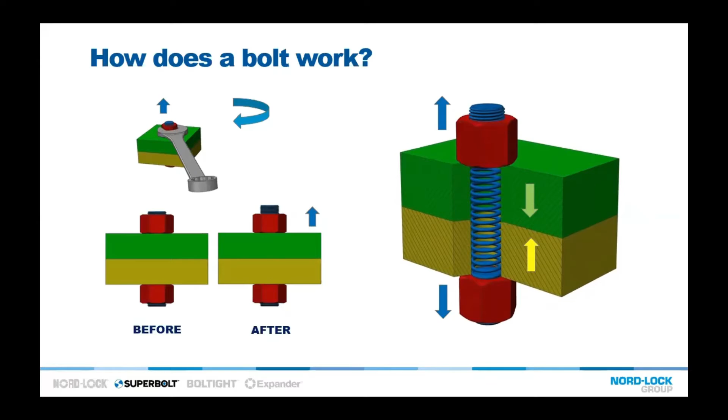So, simple principles of the bolt. I'll just quickly go through the torque formula. There are many torque formulas around today, and there's not one that is most accurate — they are all quite similar.

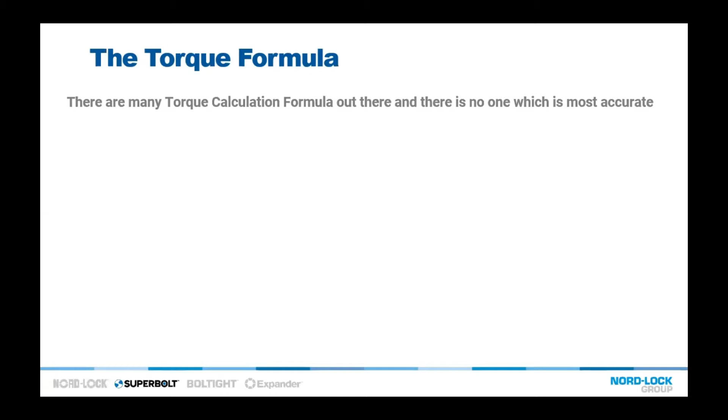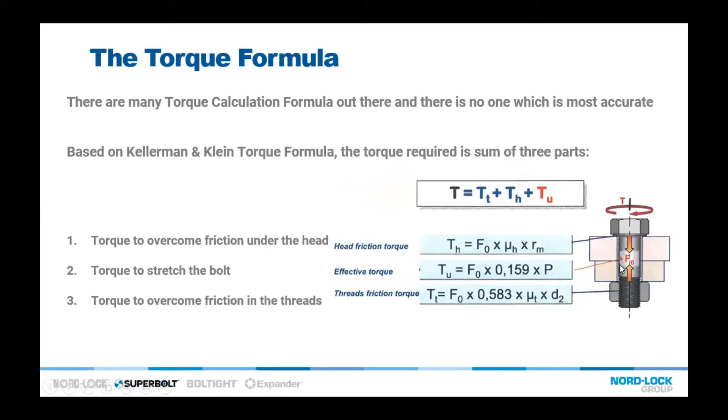Based on the Kellerman and Klein torque formula, we see that the torque is actually a summation of 3 parts. There is torque to overcome the head friction between the bolt head and the part, there is torque to overcome friction inside the threads, and there is torque to effectively stretch the bolt to give us the preload to clamp the part. So torque is a summation of these 3 parts.

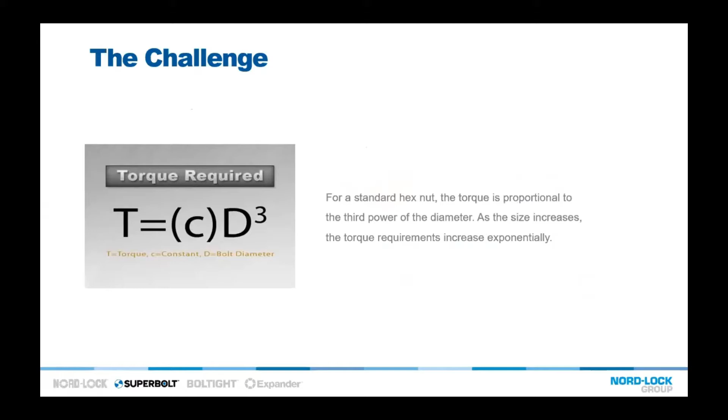When we derive this torque formula, we find out that torque is actually a function of a constant multiplied by the bolt diameter to the power of 3. So what does this tell us? When torque is proportional to bolt diameter to the power of 3, we actually get an exponential increase of torque when we get a larger bolt size.

For instance, if we have a 1-inch nut, typically that would take us 365 foot-pounds to tighten this nut to the nominal level. But when we have a 4-inch nut — only 4 times larger — how much torque do we need? Is it 4 times more? No. The torque needed to tighten a 4-inch nut to its nominal preload will be 37,850 foot-pounds.

That's not 4 times more, but more than 100 times more torque. So we now know that as the bolt size goes bigger, the torque increases exponentially, which may cause some kind of inconvenience.

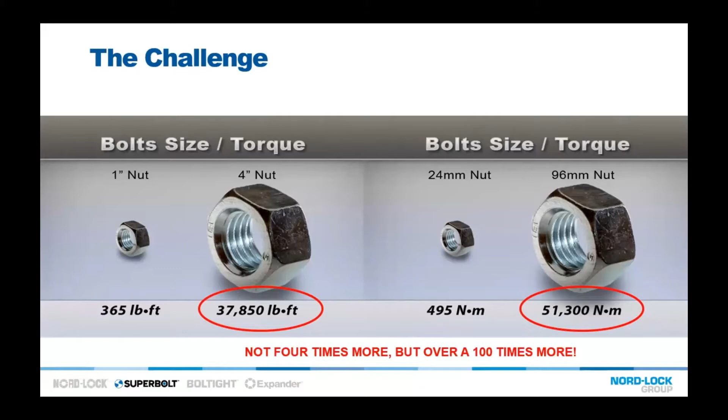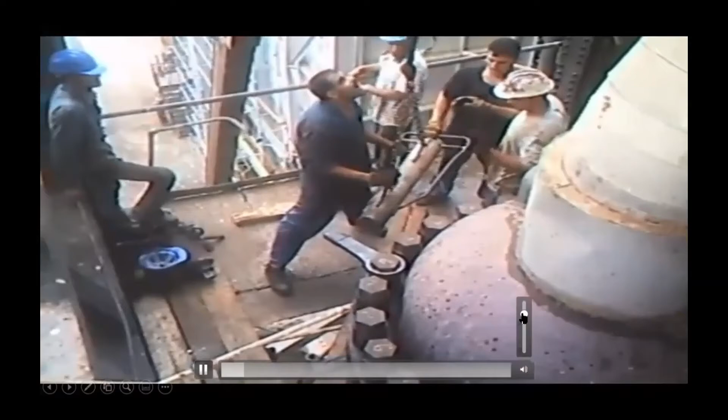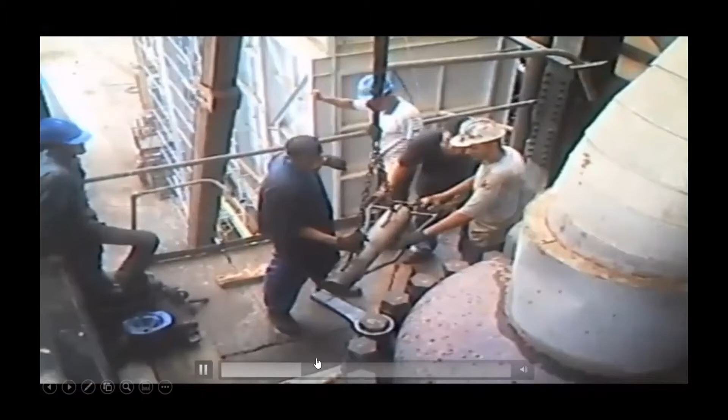On the video here, you can see what looks like a reactor cover, and these guys are really hanging this huge steel bar onto a frame. There are 4 of them trying to push the weight of it, to exert force to try to undo the bolt here. So it doesn't look very safe.

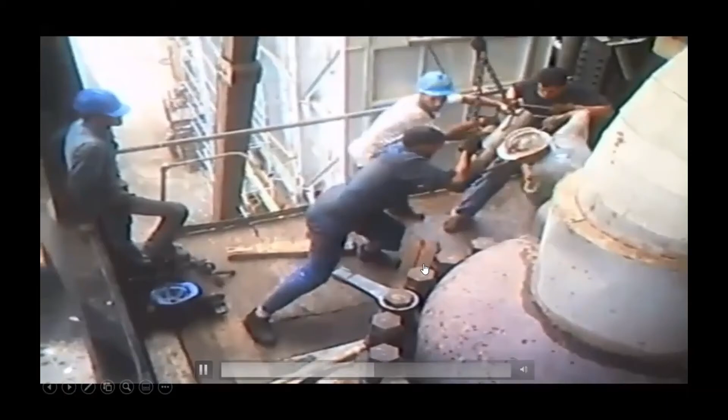And I have another one — this one was actually quite recent, only taken last month. This was how we were undoing the bolt before. Doesn't look like the best way to undo a bolt.

Here's one more. In this case, you can see there's a very large bolt on top of the machine. They actually welded two handles onto the edge of the nut, then used multiple chain blocks below, with 5 guys trying to pull the handle with the chain block. So it doesn't look like the most ideal way of doing large bolts.

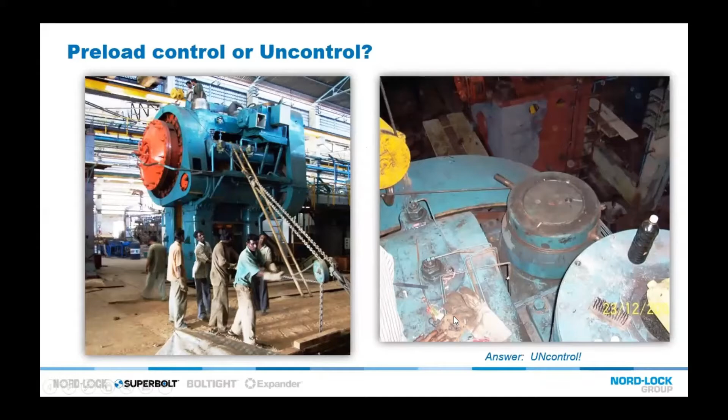So what happens when you have large bolts, typically bolts of diameter over 2 inches? First, of course, high energy equipment frequently causes injuries. That is somehow inevitable — as safe as we are, it's only a matter of time before you see accidents.

When we derived the torque formula, we found that 90% of this torque is actually wasted to overcome friction under the bolt head and in the threads. Only approximately 10% is used to actually elongate the bolt.

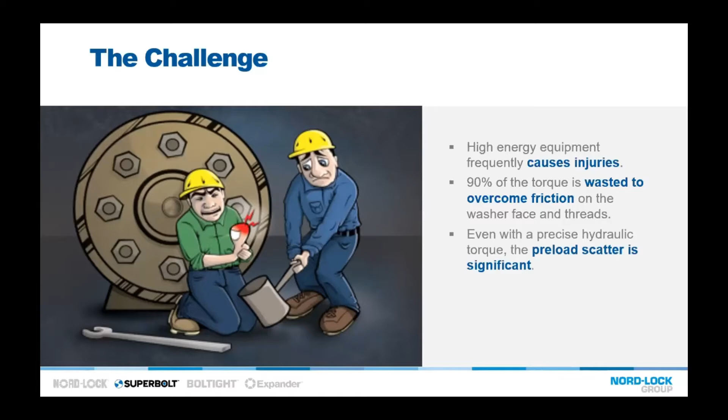Nowadays, a lot have resorted to hydraulic torque wrenches. That's also a good method, depending on the criticality of the equipment. If you need high accuracy, it may not be the best choice, because preload scatter is going to be quite high. You can get as much as plus or minus 30 to 40% preload error due to the hard-to-control friction variables in the threads and under the bolt head.

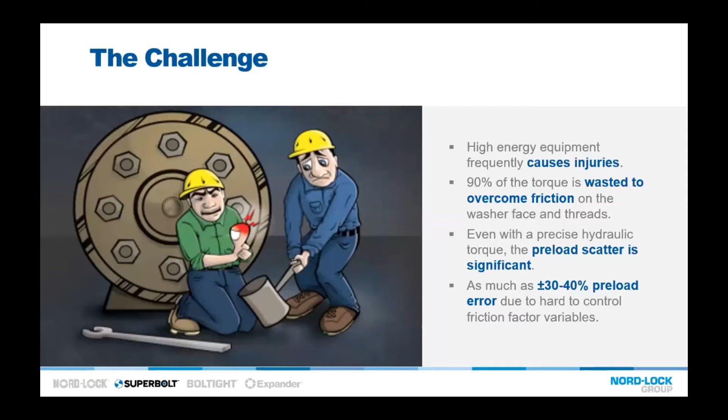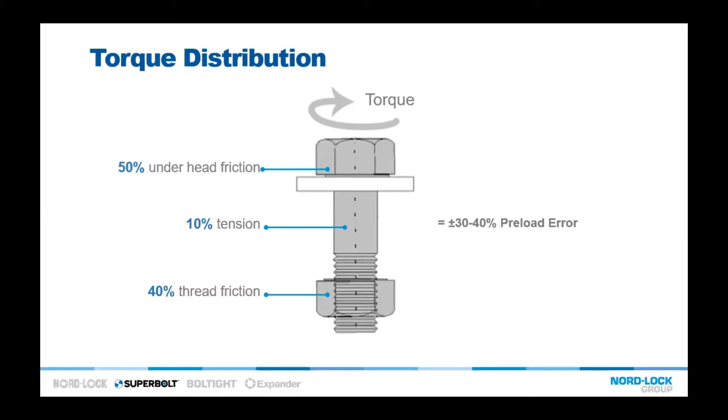So again, through the same formula, if we put in all the constants, we see that when we apply torque, 50% is used to overcome friction under the head, 40% is used to overcome friction inside the threads, and only 10% is used for elongation. This scenario is more apparent for larger bolt sizes. For smaller bolt sizes, it's not a big problem, but for bolts with very large diameter, this may have a big impact, getting that plus or minus 30 to 40% preload error.

So what do we do then? How do we actually tighten or loosen large bolts? Today I'm going to introduce the mechanical tensioner, or multi-jack bolt tensioner, from the Nord-Lock Group.

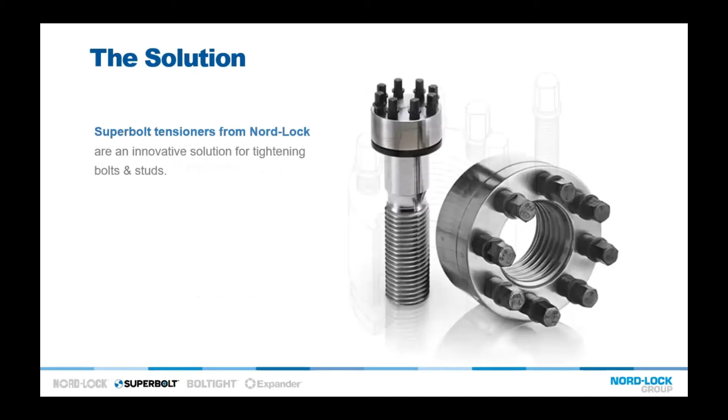It's a basic design. First we have the jack bolts - these little bolts you see here. Then we have the cylindrical nut body, which houses the jack bolts. And below we have a hardened washer, heat treated and hardened. So it consists of only 3 parts.

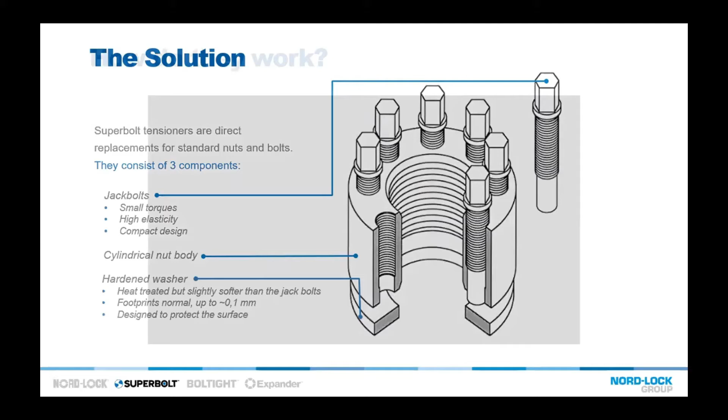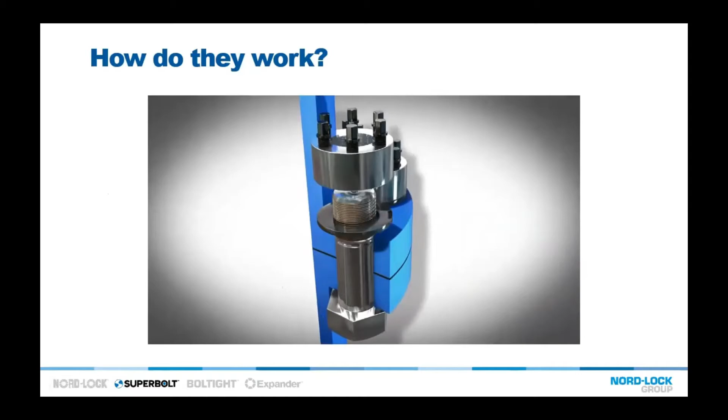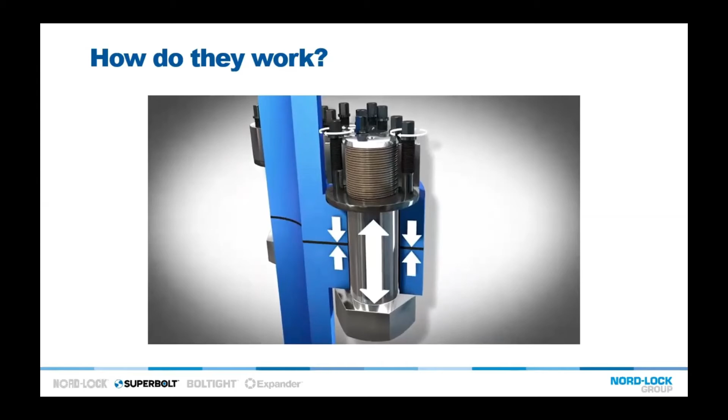How do they work? Let's play a quick video here. As you can see, they are a direct replacement of the existing hex nut. You remove the existing hex nut, use your existing bolts, then turn down the mechanical tensioner. After turning it down, you apply torque on all of the jack bolts, and this torque will exert a force on the hardened washer to eventually jack the main stud up, just as we're elongating the bolt when applying torque.

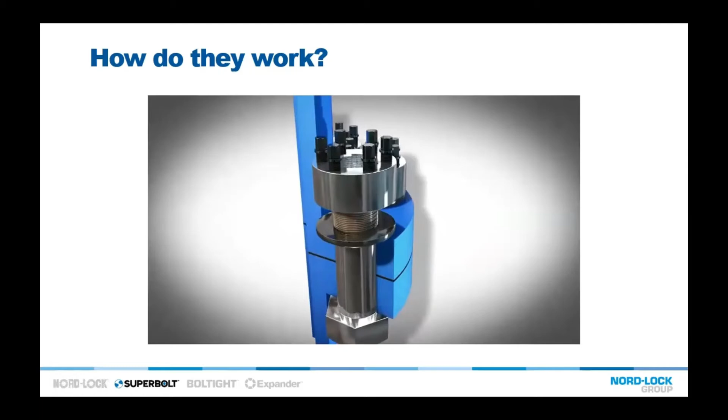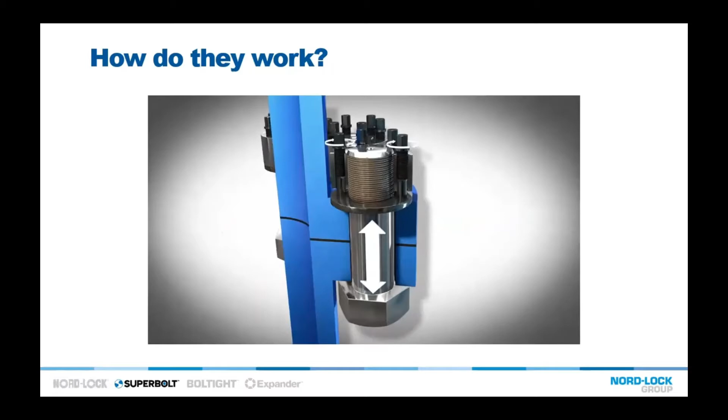I'll play that one more time. Install the tensioner - a direct replacement of the existing hex nut. We torque the jack bolts, which exert force on the hardened washer, jacking the main stud up. This jacking creates an elongation or stretch, which is directly translated into a preload and then converted into clamping force.

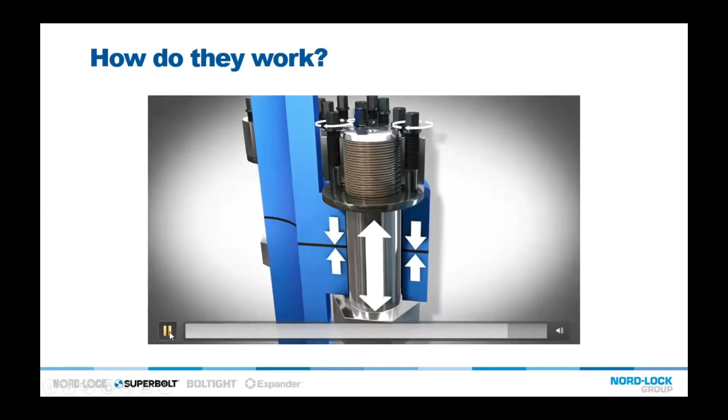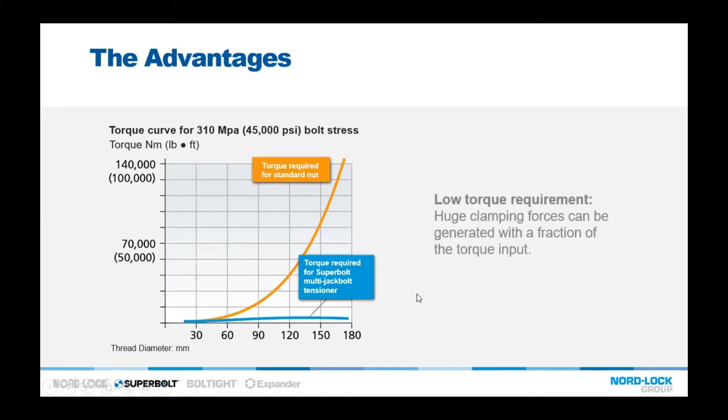The advantage of using such a method - here you can see a curve. On the x-axis we have the bolt sizes in metric, M30, M60, M90, and on the y-axis we see the torque required in Newton meters, 70,000 and 140,000. As the bolt size goes bigger, per the formula, it increases exponentially, so for M120, M150, you get a very high torque requirement. But with the multi-jack bolt tensioner, it's relatively extremely low in comparison - low torque requirement, and we can achieve the same huge clamping force.

To see that in better perspective, here we have a table. Let's focus on the 2-inch bolt. If you would target a bolt load of 779 kilonewtons, with the conventional torquing method, you would need to exert almost 7,000 Newton meters of torque. But if you replace this with a Superbolt tensioner, it would only take 77 Newton meters on the torque wrench to get to the same target bolt load.

That can be a huge difference, but again, it depends on application. For certain applications, it can be more convenient to use a torque wrench, but for others - if we need crane lifting, if we need to climb up the monkey ladder, or there's space constraints - then a multi-jack bolt tensioner may be more suitable.

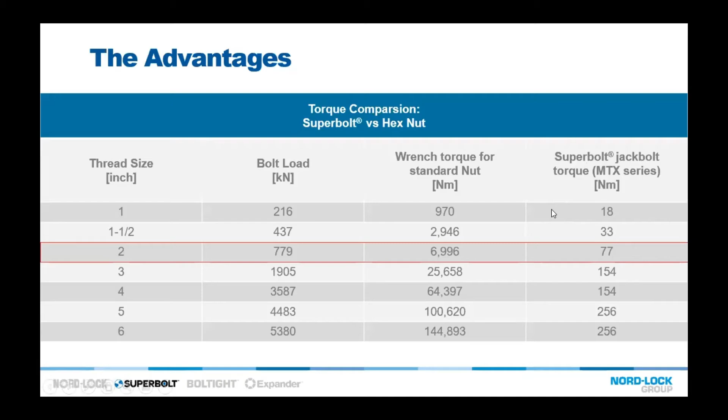There's none that is best of both worlds, but they're all good for their own advantages. So what else do we see as the advantages?

Of course, with low torque, that translates to safety. Only exerting 77 Newton meters is going to be almost effortless - you can do that with a Norbar 100, so it's very easy to tighten, and only hand tools are required.

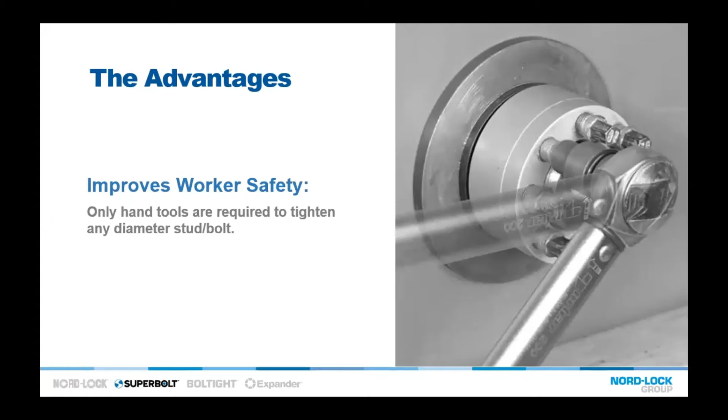With these tensioners, because we are not overcoming much friction, you get very high preload accuracy. Most of the time we get about plus minus 5%, but in the worst case, you can get to plus minus 10%. So it's within 5 to 10% preload accuracy.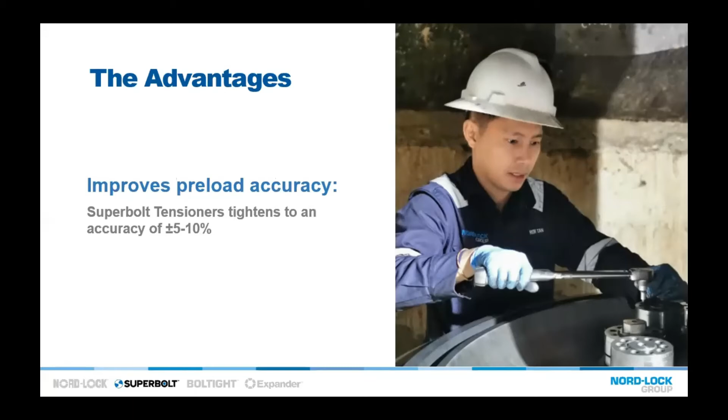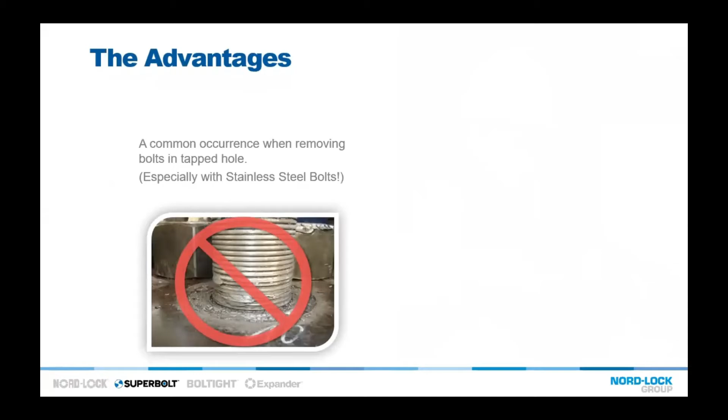Here you can see there is a common occurrence, especially with stainless steel bolts, where you get galling or seizing in a tapped hole. But because when you do tensioning with this mechanical tensioning, you're actually stretching the bolt directly in pure tension, that doesn't create any torsional stresses at all, which may lead to occurrences like galling. So another problem solved.

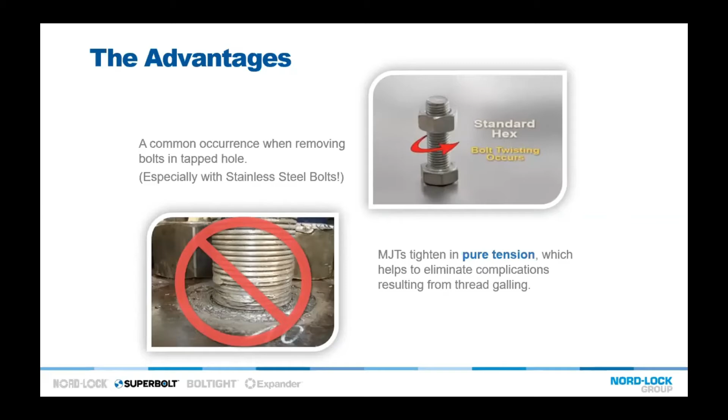There's also one part of the design of the Superbolt tensioner. Before tightening, we see that the tensioner body, its outer diameter, is kind of even. But after tightening the jack bolts, we see that the tensioner body actually flexes. In this diagram it's a little bit exaggerated, but we could also measure it with a vernier. We see that the upper body dimension has shrunk, flexed inwards, and the lower body dimension has expanded or flexed outwards.

What does this do? It actually creates additional elasticity in the joint because it acts just like another spring. We learned earlier that the bolt holds two parts together by acting just like a spring. Now we have a second spring on the nut body, and not only that, these jack bolts, when tightened up to nominal strength, are actually being compressed, and this compression also adds additional spring effect, acting just like a spring as well. So the bolted system now has not only the main stud as a spring, but also the tensioner nut body, and also each and every single one of the jack bolts.

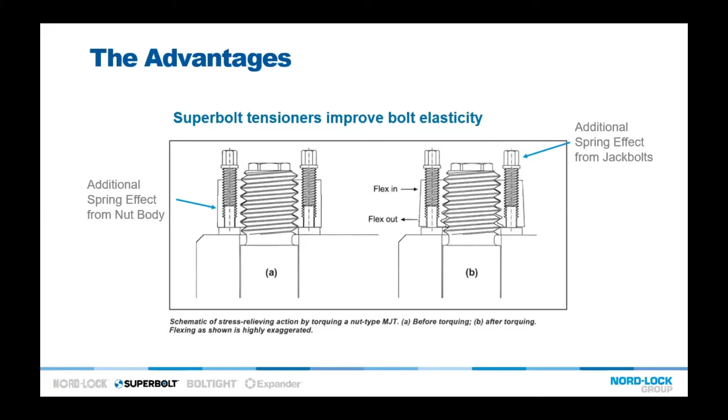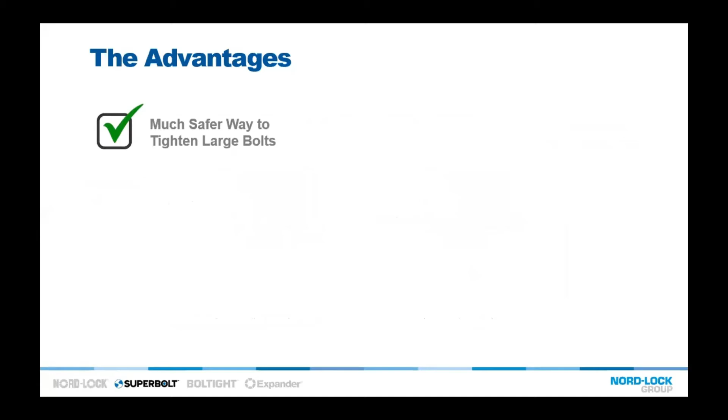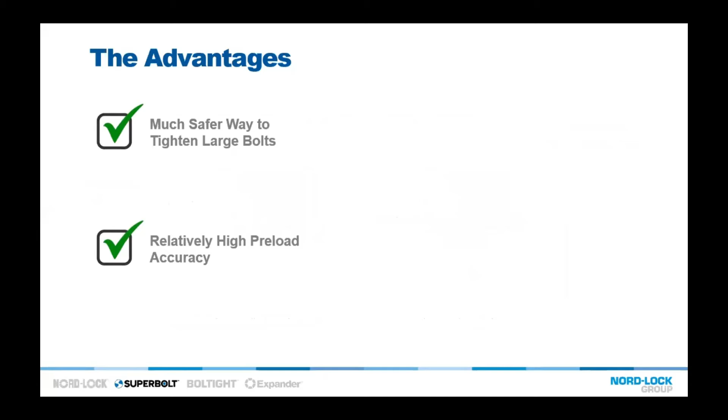To sum it up, it's a much safer way to tighten large bolts due to the fact that the torque requirement is very low. And it's also relatively high preload accuracy, again most of the time plus minus 5%, which we can verify with ultrasonic measurement.

And zero torsional stress is introduced. When we do torquing, we normally don't only apply torque on the nut, but indirectly apply some torsional stress on the stud as well, so it's somehow being twisted as well. So with MJT, zero torsional stress and much added elasticity compensate preload loss, especially for applications like heat exchangers, where you have thermal cycling effect.

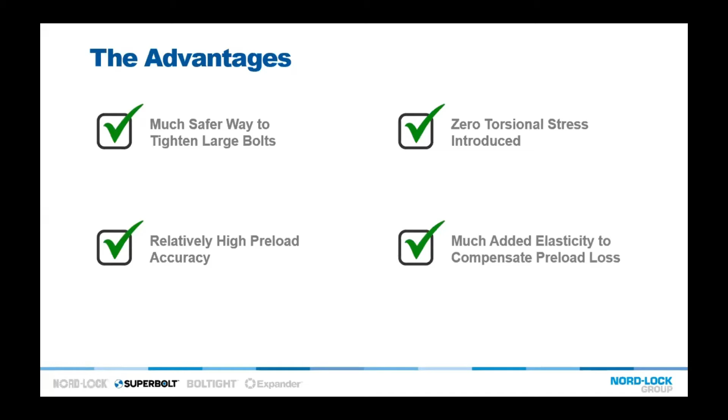The Superbolt is not something very new. It is a company founded in 1985, so it's already been about 35 years now. It has also been used in many industries around the world: railways, steel, oil and gas, entertainment, roller coasters, bridges. I'll just show a couple of examples here on where they are used.

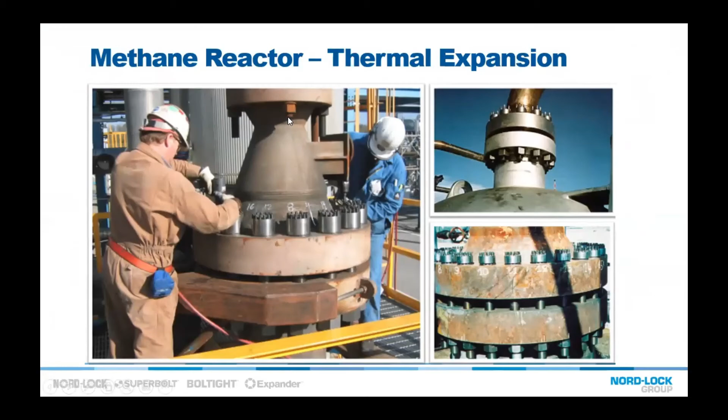Here we can see the Superbolt being used on a methane reactor, which we highlighted for thermal expansion because this is one of the joints where we have solved problems with thermal expansion. You can see the Superbolt is installed in multiple parts, on the bottom flange and on the top flange as well.

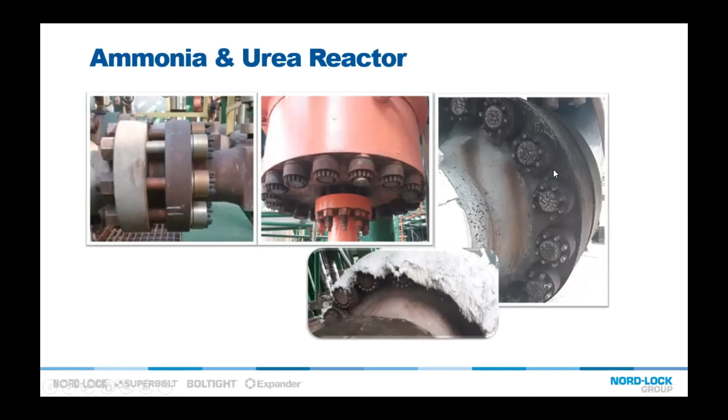And this example is for an ammonia and urea reactor, where we do this quite a lot as well, solving problems with tightening. In most cases, they were using cranes for this kind of joint to tighten them. So now we only need to use a simple torque wrench.

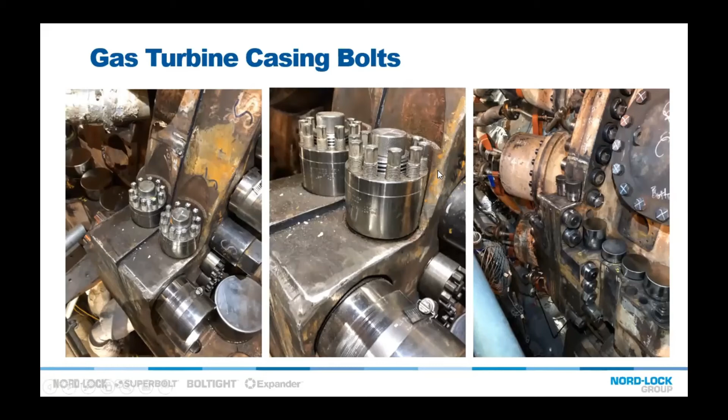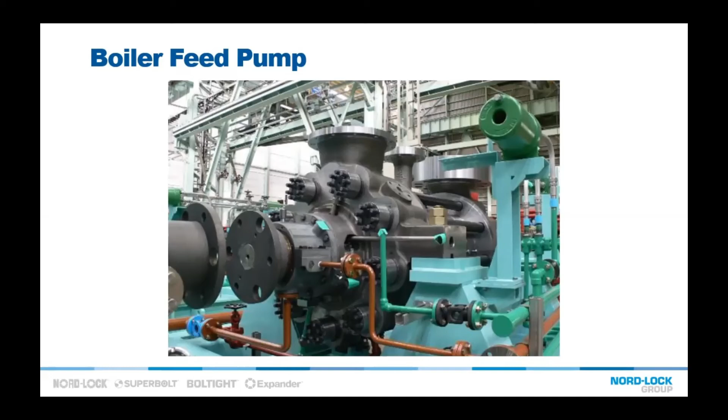This is one reference from Japan. They are now using Superbolt also as an OEM part on boiler feed pump, another good application. We do a lot of retrofit as well for boiler feed pumps because customers gave feedback that they were always using OEM bolt tensioners and the pump often breaks down. So today we do not need to rely on a hydraulic pump anymore, just relying on the torque wrench.

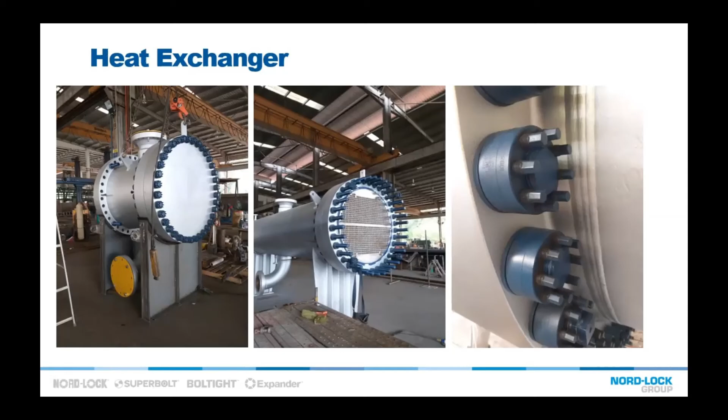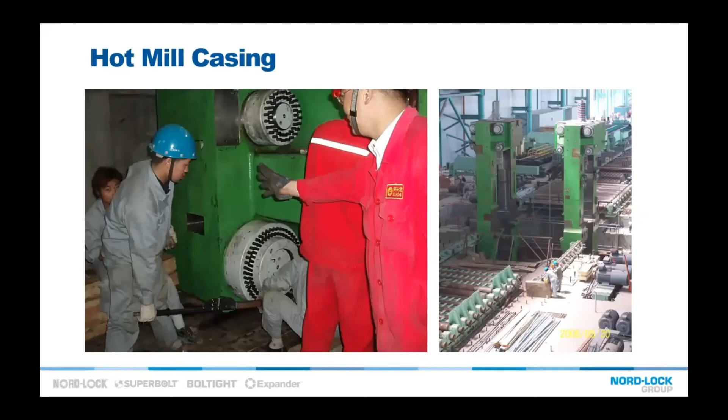Steel plants, of course, where we have many large bolts. You can see here these are very large in size, but can be tightened just with a torque wrench, slightly larger, probably an 800 Newton meter torque wrench. No matter what the bolt size is, all you need is a torque wrench to tighten the bolt. This is another case from Japan.

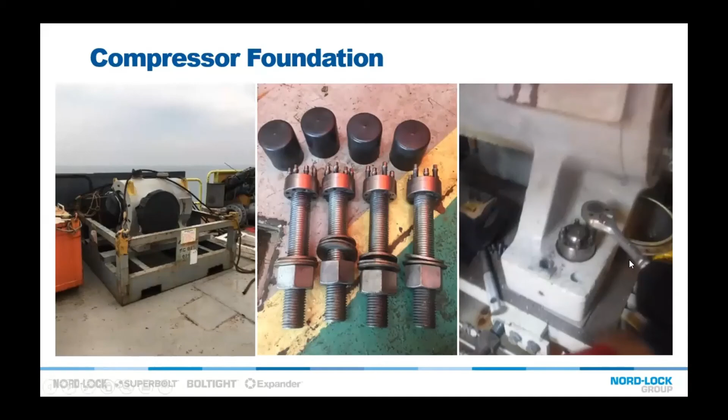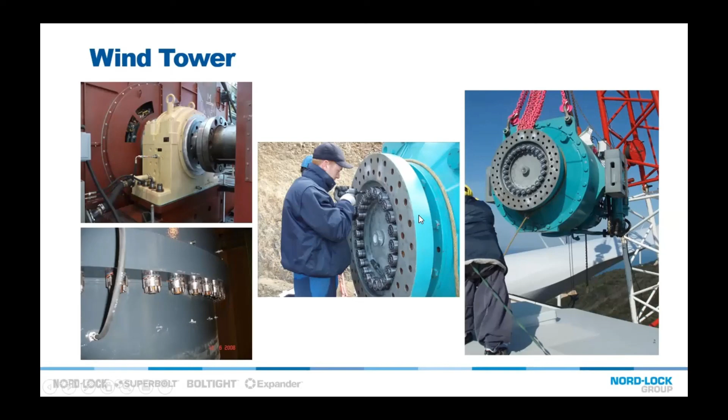So you can see typically where we can use Superbolt - almost everywhere, as long as we have a big bolt size and difficulty tightening it or reaching it in a tight space constraint. You can use it with the standard or existing stud, no need to change if you don't want to. The threads are customizable - we can make it into any standard thread dimension or custom thread dimension, like use it for a through hole. Here we have a flex nut below.

We'll get to that later. So, tensioner and a nut on the other end. And if we have a tap hole and don't want it to be 2 parts, we can also do it in a bolt style like this - 1 part altogether, not as a nut but as a bolt, so you only need to care for 1 part. And even for counter bores, we also have low profile tensioning, which doesn't have its jack bolt sticking out, usually for rotary or high speed equipment.

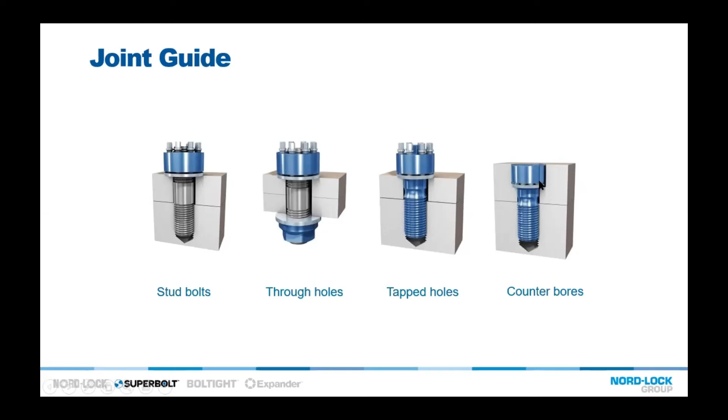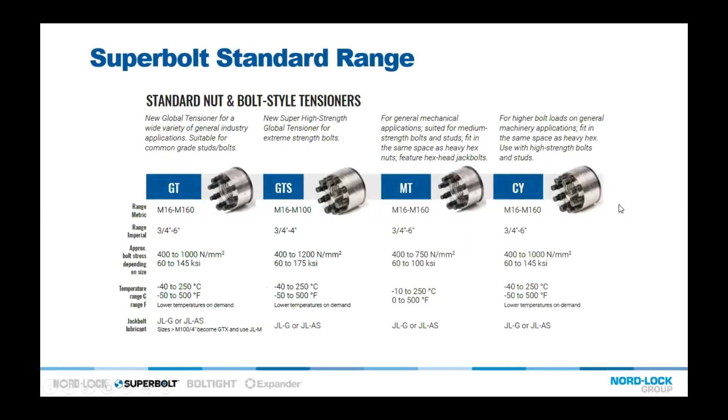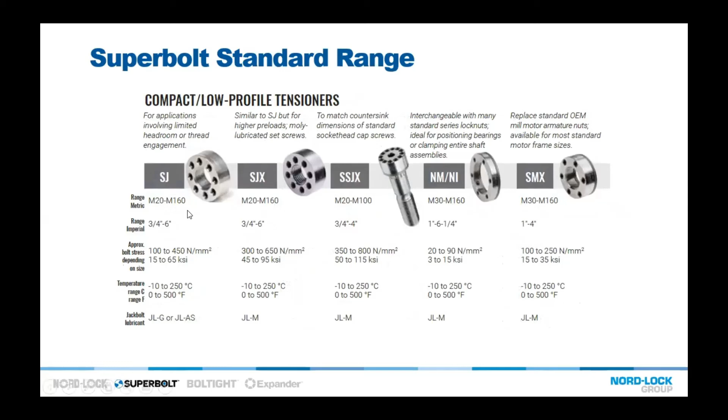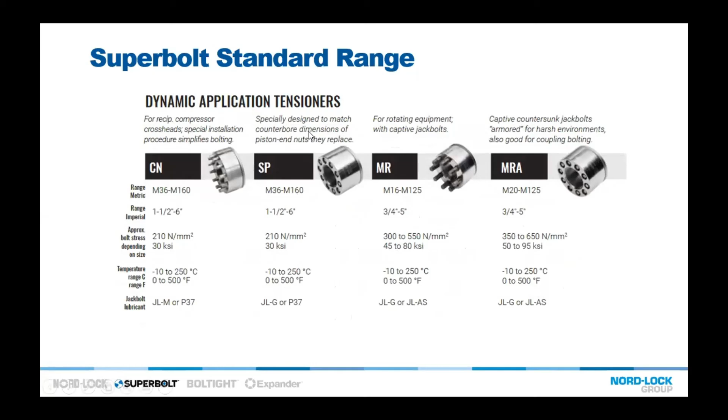Just to go through a little bit about the standard range - these are the standard nut range. We've got medium strength, high strength, bolt style as well, medium temperature - these are really our most common Superbolts. But we also have low profile ones, which don't have the jack bolt sticking out, a few models depending on application needs. And also some special ones, sometimes for high-speed coupling or for cross-head jam nuts or something - so there are some special Superbolts as well. There you go.